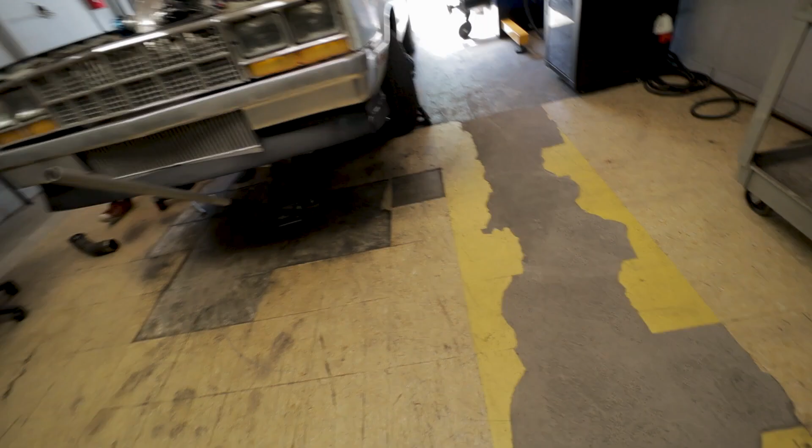I'm not sure that's the most effective use of a jack stand. Just set it next to the car.

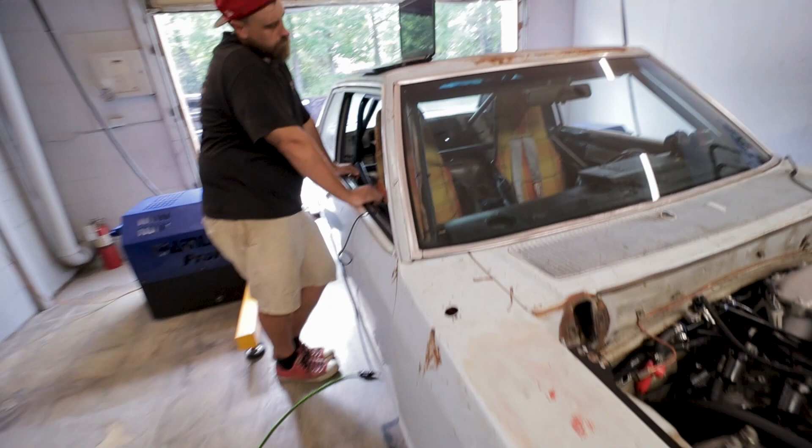Laptop number 3 this week is taking a dump. What the hell? Firmware update again.

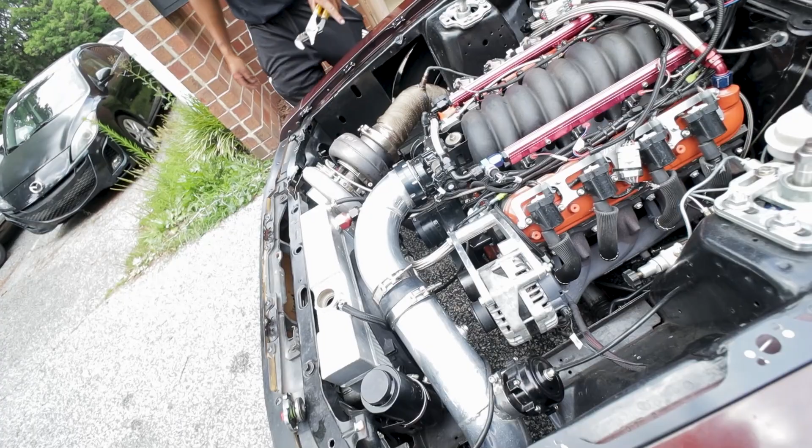Pain in the ass. Now what the hell are you doing? Well, you remember when that belt threw last year? Every single time, all these LS things, everybody shoots belts off. So I got lucky, somebody saw it, it was eating into the... oh shit. Yeah, so I went to Henry's this morning and got a new line.

Yeah, it's always something. I can't win with this thing sometimes.

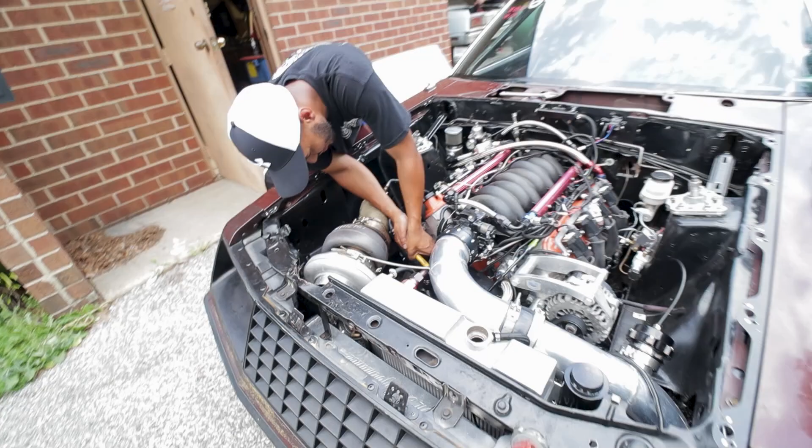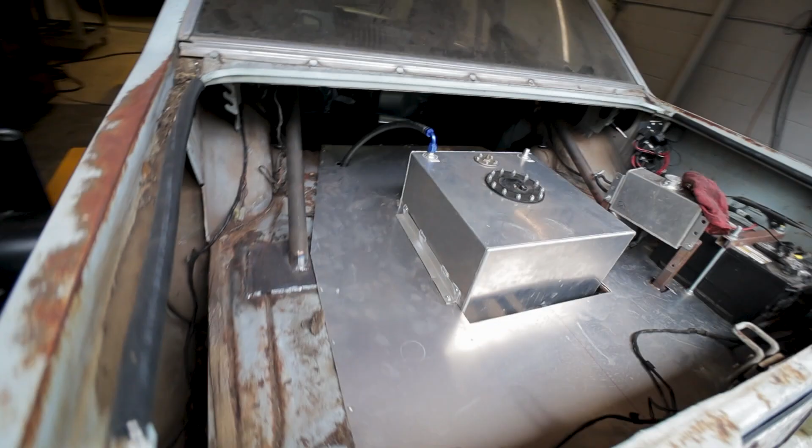Yeah, like, I'm sure you saw the whole thing's like blown up. Actually go back together? Yeah. And you guys like those long dump tubes.

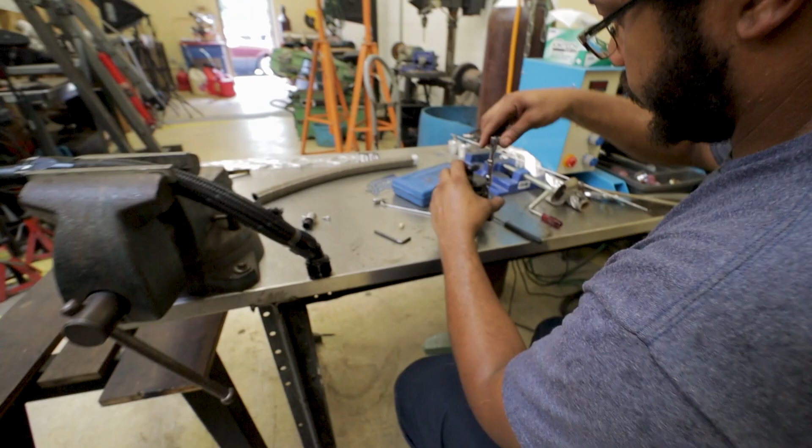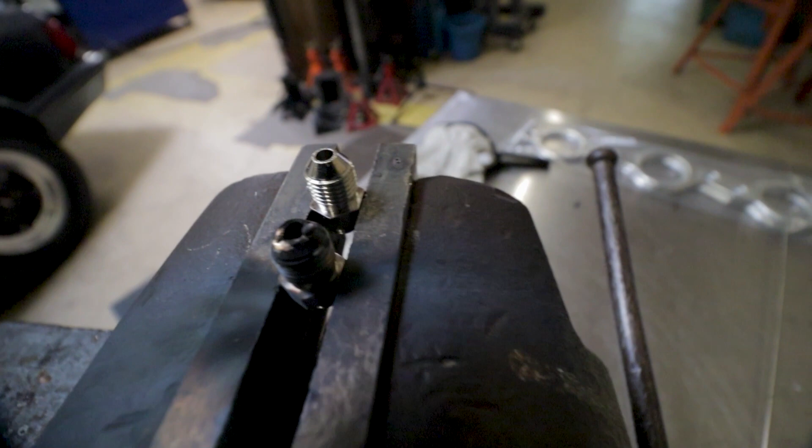Chinese wastegates are leaking CO2 out of the coolant fittings. We don't have any plugs, so we're just going to weld this shut. Kind of ghetto, but it is what it is. So it turns out these are like painted brass, they're not actually stainless, so that didn't go as planned. I'm going to try an actual Tial water fitting and see if that's not just some painted trash. Maybe that'll weld. Chinese fitting, Tial fittings, big difference.

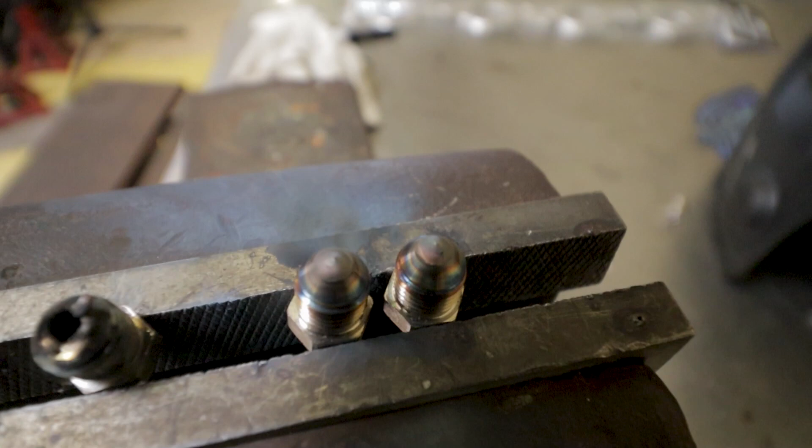Alright, I've been going at this way longer than expected to be as far along as I am. The O2s and stuff are doing some stuff that I don't really like, so I've been taking some baby steps, and might need plugs, got a little bit of a misfire. But just a few pounds of boost, there were about 500 so far.

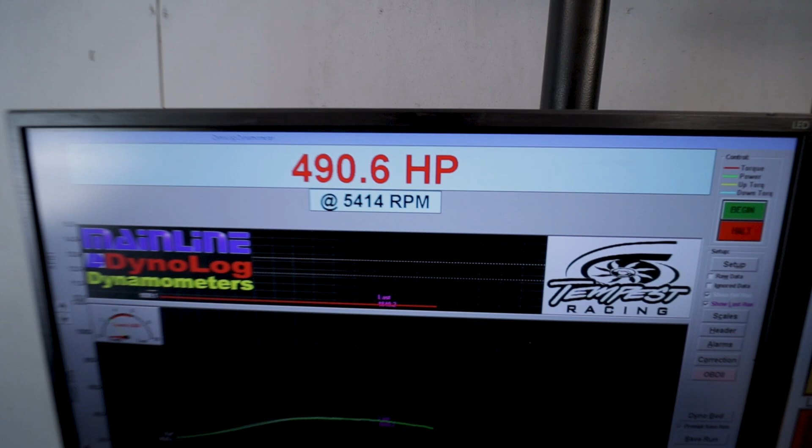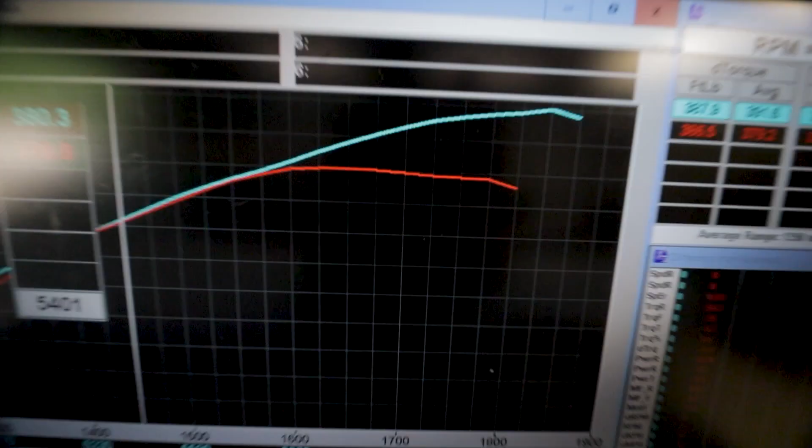There's something you don't see every day. It's got Holley in it too. There's 5 cars here right now with Holley in it.

Alright, finally starting to make some progress. I've been running around like crazy messing with multiple cars all day, so haven't gotten a chance to film much, but we'll start now that everything's actually working.

So I didn't get to film as much of this as I would have liked to on the first day, between computer problems and firmware updates and multiple cars and multiple customers here all at the same time, and then troubleshooting some different issues. Didn't leave much time for the camera, but I guess basically I'll kind of explain what we had going on.

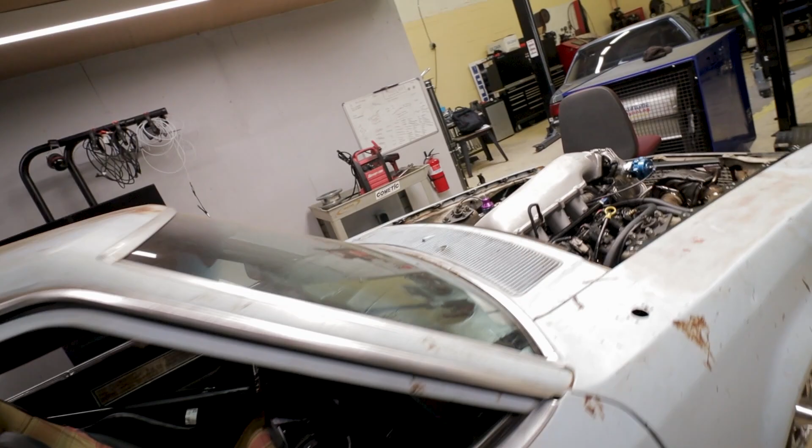The first thing was the computer decided to just shut off and took forever to turn it back on. And then once that finally started working, we needed to do a firmware update and actually upgrade from V4 software to V5 software, which if you've ever done that with Holley can take 30 minutes, 45 minutes, so it takes a while.

Also changed our load from speed density to volumetric efficiency, so basically started all over again on the fueling. And everything was going good, but I kept getting these weird fluctuations in the closed loop control, and it was just kind of unusual. So I kind of ran back and forth on that a little bit, tried revving it out.

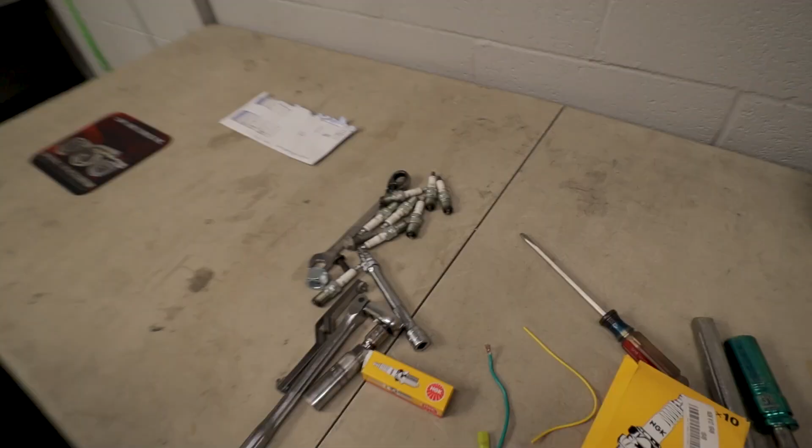And then we started dealing with some misfire problems, so then we had to address that. So once we pulled the plugs out, I guess some plugs were put in just when they were doing fabrication on the car, and they kind of forgot they weren't proper plugs.

So I think we got 3 different heat ranges there, and the plugs are from World War II, so we figured that might do it. It didn't.

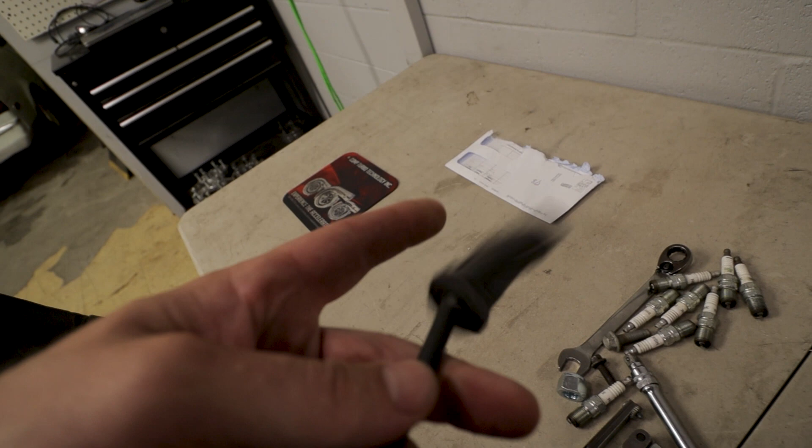And then we found a spark plug wire that's blown up. We have like 6 MSD wires and 2 factory wires. So I thought that would do it. That wouldn't do it either.

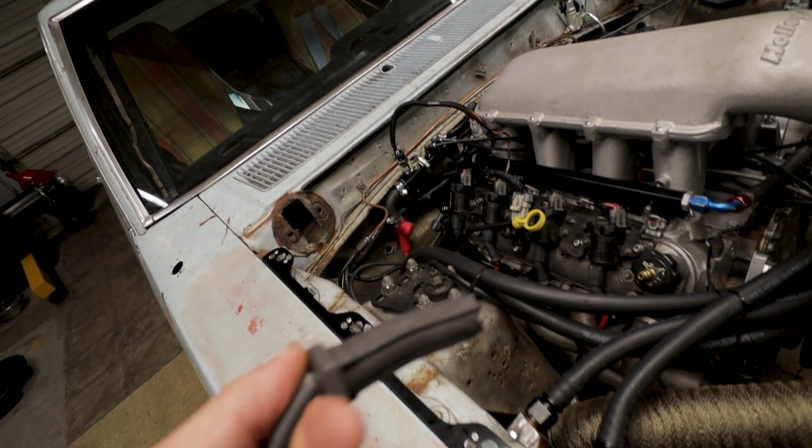And then it just turns out we had a ground wire that was, geez, I wouldn't even consider it loose, just not 100% tight. Fixed that, everything that was weird went away, and at that point it was basically time to go home. So I'll put this back on the dyno in the next few days, and we'll kind of start all over again, and hopefully we got all the stuff sorted out, and it'll be a little bit smoother sailing next time.

Alright, it's been about a week or so since I last had this on the dyno. Just got swamped with a whole bunch of other cars. These big power race cars take a lot of time, so I didn't want to rush through it, and waited till I had a chance to spend a little more time with it.

So gonna try it again. It's raining, insanely humid. Kind of feels like I'm walking around in a bowl of soup, so it sucks in here. I don't really remember where I left off on this car as far as video stuff goes, so basically just gonna start all over again.

What is kind of cool is I spent the morning - damn it, I gotta turn the car on.

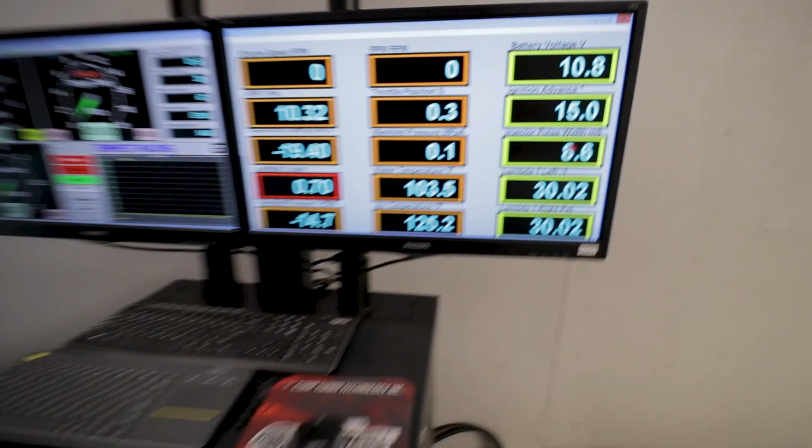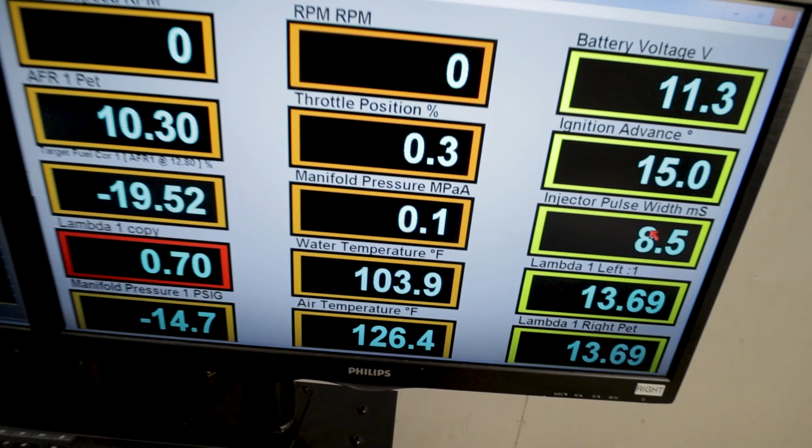So basically I have all of the information that the Holley ECU sees, which you can look through in data logs and stuff. I made some junk and ran it into the CAN bus of the car, and now we can log all the ECU channels through the dyno. I haven't used this yet, so I'll probably be fumbling around with it trying to figure it out while I do this car, but this is going to make a lot of videos a lot more interesting, I think.

So we have the turbos and intercooler up front, and the radiator is actually in the back. Last time it was running really hot without running another fan to it underneath, but yeah, the radiator's back here.

I've been playing with idle, injection timing, and some other stuff. It's still running a little hotter than I'd like to see, and it looks like we got a fuel leak now.

So I'm going to investigate and see where that's coming from. Hopefully it's something simple.

So that's shooting directly onto the header. Thank God we're on the dyno and in a controlled environment, because that could have been really, really bad.

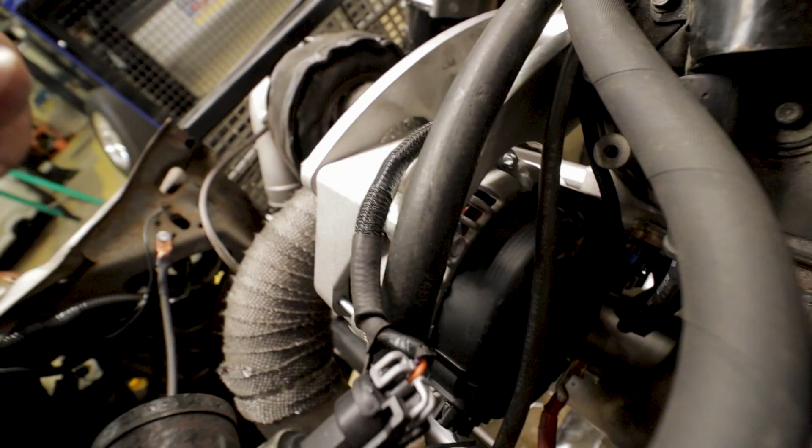I have a used Dash 8 hose here. It's a 90 on one end like that one, straight on this end. That one's a 90, but actually running the straight fitting will help get it away from all the crap that destroyed it in the first place. So I'm going to make up this line, shorten it, and throw that on the car.

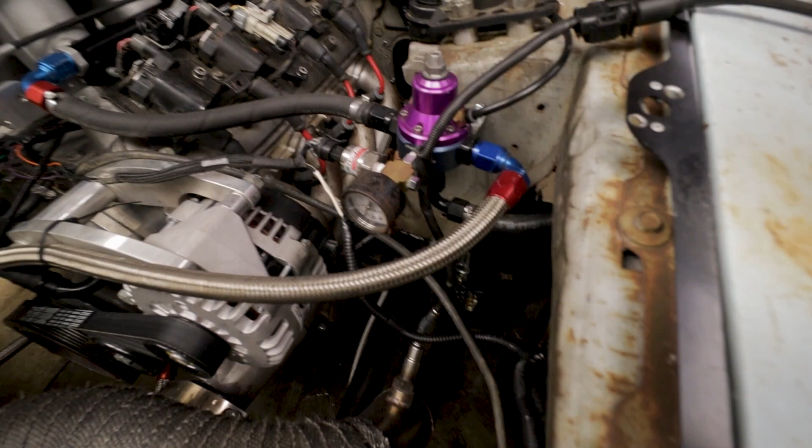Alright, this is just a temporary fix, so don't judge me, but hopefully it won't leak now, and we can kind of start making some more progress.

Throttle cable broke or came apart. I don't know if I have anything here to fix that. Things aren't going very smooth so far.

Basically been trying all day to get a solid baseline run, but haven't been able to do that yet. Just rigged the throttle cable temporarily and see if we can't make like a full pull.

The last runs I made, last time it was on the dyno, it was running like a million, and now it's spitting and sputtering down low and low on power, so something else is going on. I'm gonna try and look it over one more time.

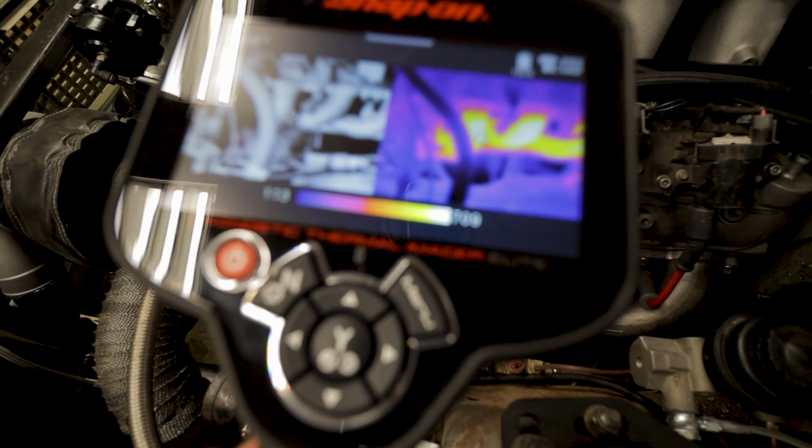Looks like it's working now.

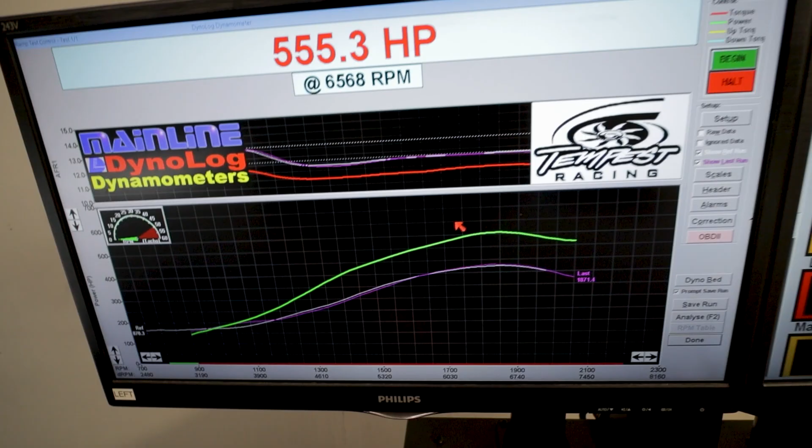Looks like we can finally get started now.

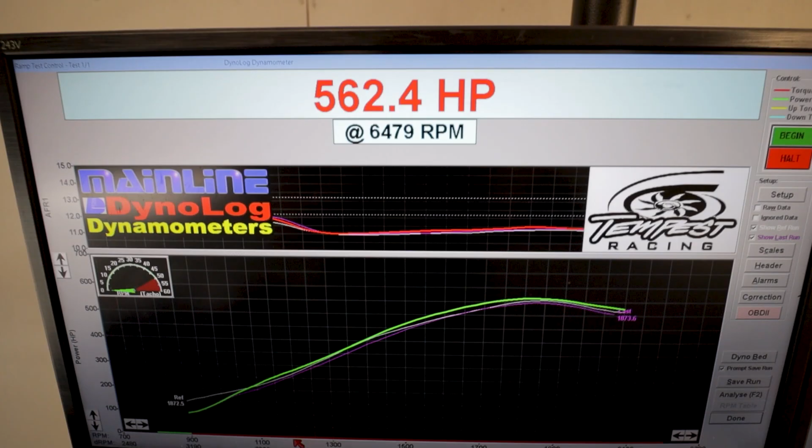Picked up a few horsepower with a little timing, not enough to keep going, so turn the CO2 on now. So far we're at like 10 psi roughly.

Not too bad for just throwing a couple pounds on it. Playing with some ignition compensation stuff. Let's pull the spark plug out of it. I don't care, whatever's easiest to get to.

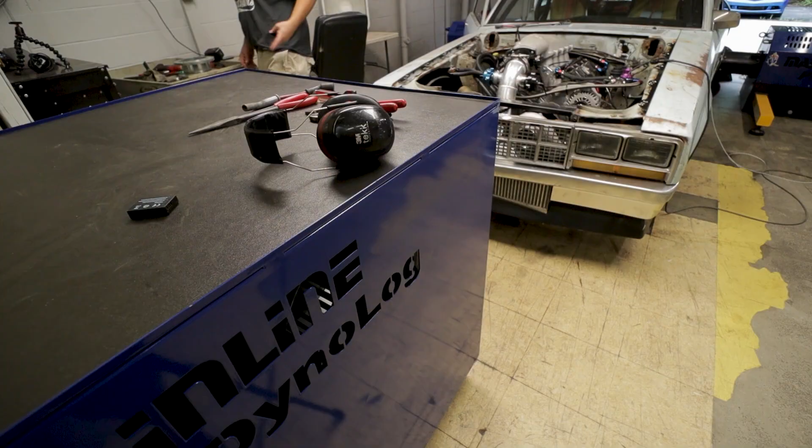Probably can't really see that, but just pretend it looks awesome. Picked up about 50 up top with timing. Right at about 700 now. They probably pick up 40 horsepower if you let it cool off for 10 minutes. It's really hot.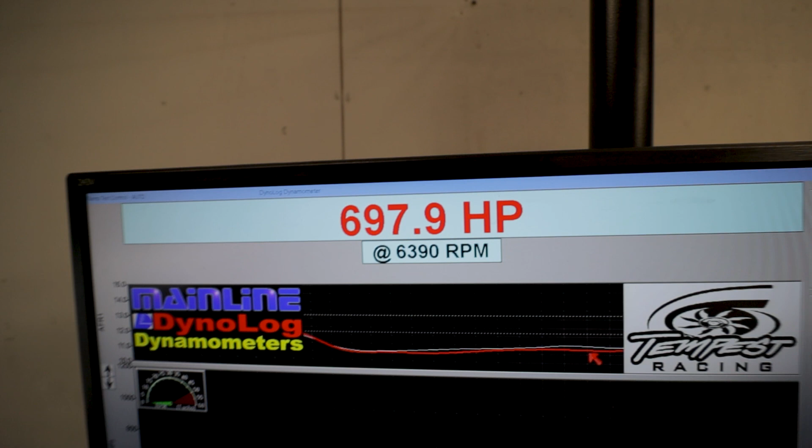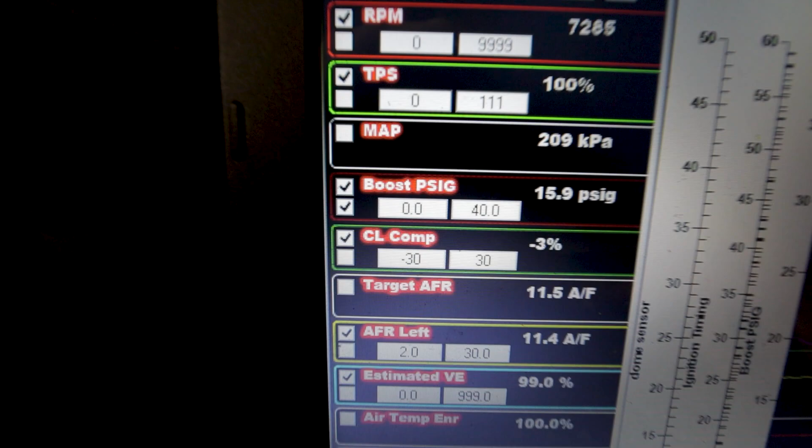Fueling's pretty spot on, basically like 0-1% a majority of the way. It touches 2 every now and then, but perfectly okay with that. 15-16 pounds, about 700.

Alright, it's Friday, it's about 5:30 or so. We're going to call it a day here. Battery's getting weak. It's 4,000 degrees in here. I'm sweating my balls off. Can't even touch the intake manifold. So I just want to let everything cool down rather than trying to rush through it and throw 100 pounds on the top of the gate.

But I'll show you a few things that we have going on. Now that I can log ECU data through the dyno, it's really redundant because you have all of the same information in the data logs, obviously, but being able to lay it over top of the dyno graph and sort of see it all in one spot, and I can lay screens out differently. And then there's some other stuff too, but I'll just kind of walk you through a few things that I've played with so far.

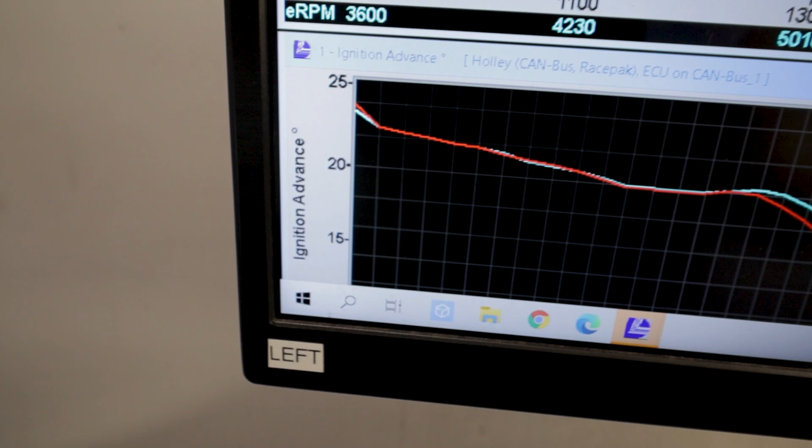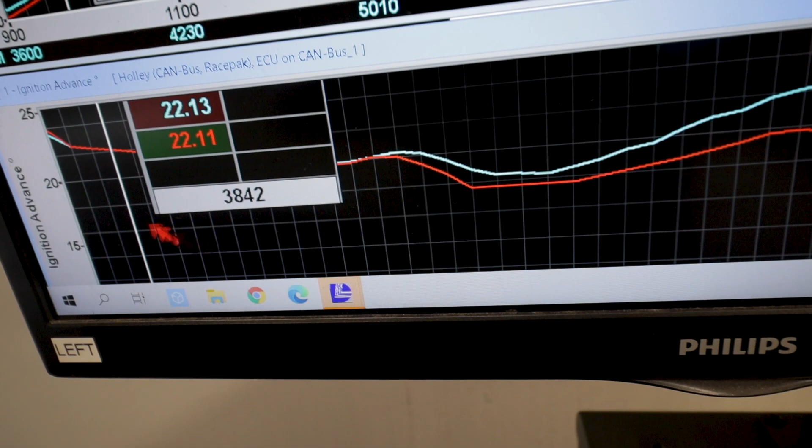Most of this stuff's pretty self-explanatory, but you know, it's always good to see it on a dyno graph, so this will make for some pretty cool testing videos down the road. Between these two runs, you can see timing drops as manifold pressure comes up, peak torque kind of, or as it's ramping up to peak torque, pulled a little bit out. And this one's laying over a little earlier than I'd like to see, so just kind of keep giving it timing upstairs, and it ends up being pretty flat. Every time I give it timing, it likes it, but I don't really want to go too much higher.

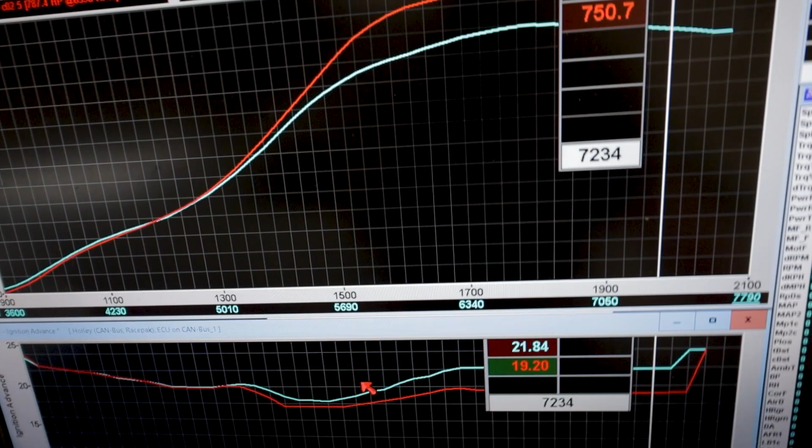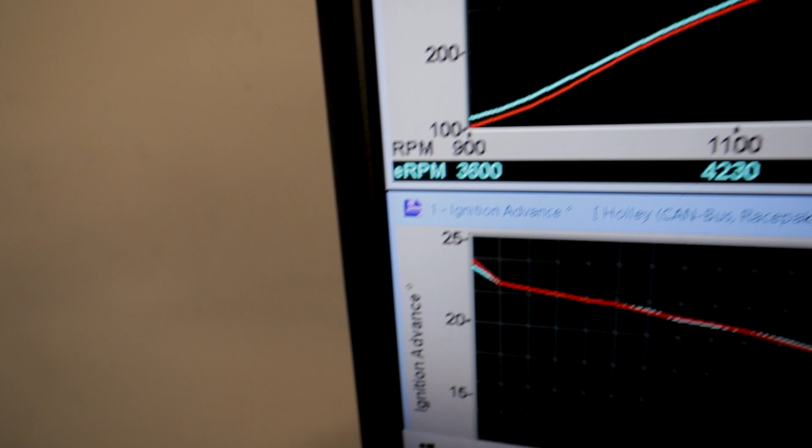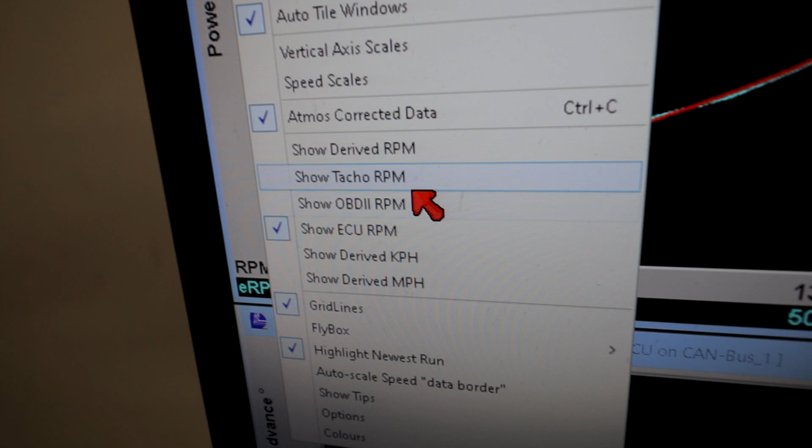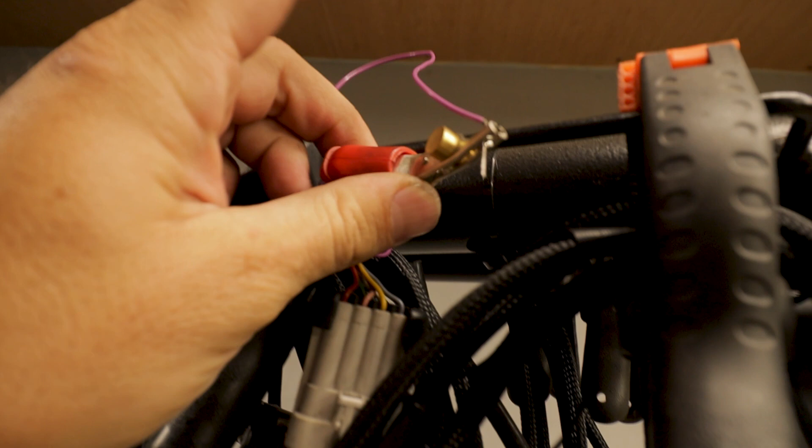And then I have the OBD2 stuff as well. Unfortunately, I can't run OBD2 in line with HP Tuners, so I don't get to use it too often. And then tach RPM is using, I get a clamp, and then these here. This one works awesome, but it's a little tedious to hook up on certain cars. These ones a little hit or miss. On street cars, it usually works every bit as good as it needs to, but you throw it on a 2,500 horsepower car and it kind of starts dropping out.

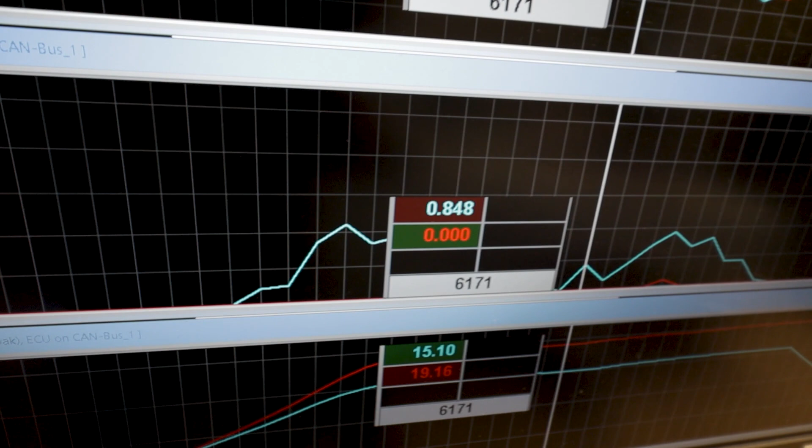And then able to see air fuel from the actual ECU, so that's convenient. Everything looks a little choppy because of the scaling and sample rates and stuff, so that's all adjustable, I just haven't had time to play with it. And again, we already looked at, we have closed loop, which we can see what the corrections are, which is pretty good. And then we have manifold pressure from the ECU, about 19 pounds on that one.

So I have a handful of different pressure sensors and stuff. You can still use these in line if you want to measure pressure from something that the ECU doesn't have, or you want to verify that the ECU map sensor is reading correctly. I've had it before where cars will make 200 horsepower more than they should at a given boost level, and then you find out just the O-ring for a sensor is bad or something. So it's always nice to have other options.

There's all kinds of other stuff that we can do and look at as well, but this is really all I've had time to play with so far. So let this cool down a few minutes.

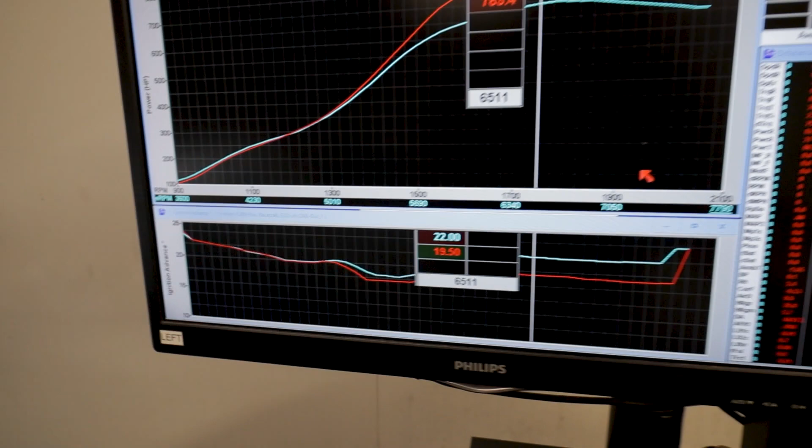This will make 800, no problem. And I think we're just trying to get to like 1,000. So I don't know if I'll make it here over the weekend, but if not, I'll try and wrap this thing up on Monday.

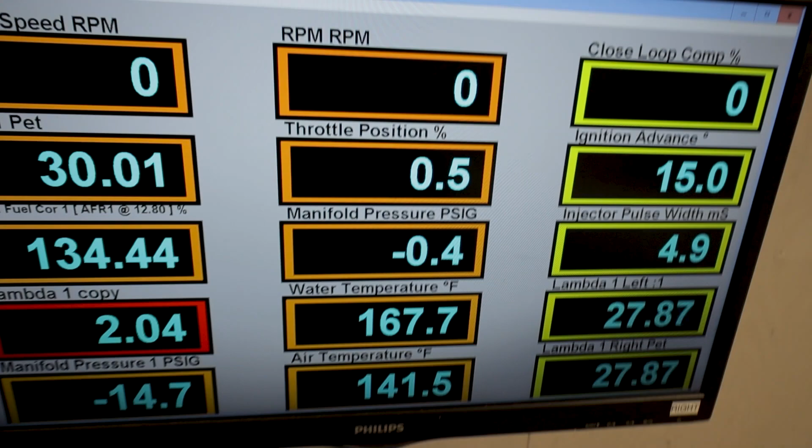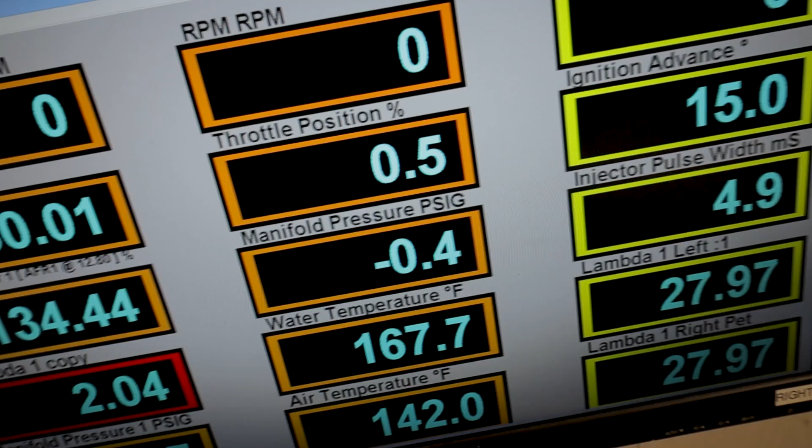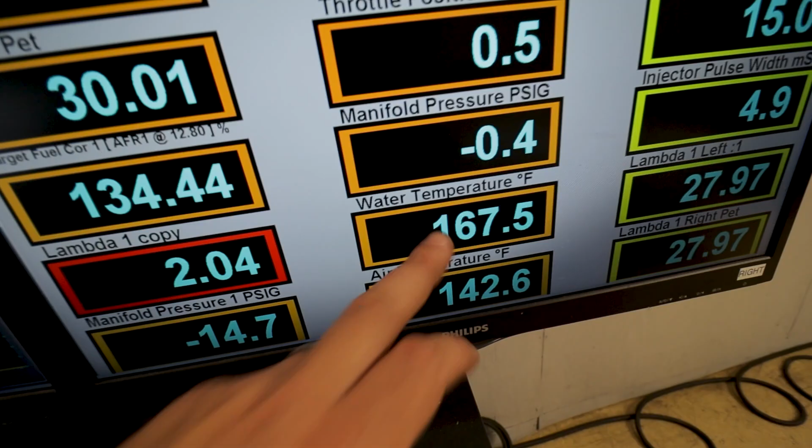Here's just some of the ECU channels I had pulled up that I can look at on this screen while I'm making a run. These are basically all the ones I would use when I'm not using all this other stuff, and I can configure this however I want with basically however many channels I want. Just the more you have, the smaller they get. But ECU RPM, throttle position, manifold pressure, temperatures, lambdas, pulse width, timing, closed loop. Just having the water temperature up on here is really nice. And then I can keep an eye on all the sensor data on this screen as I'm making a run.

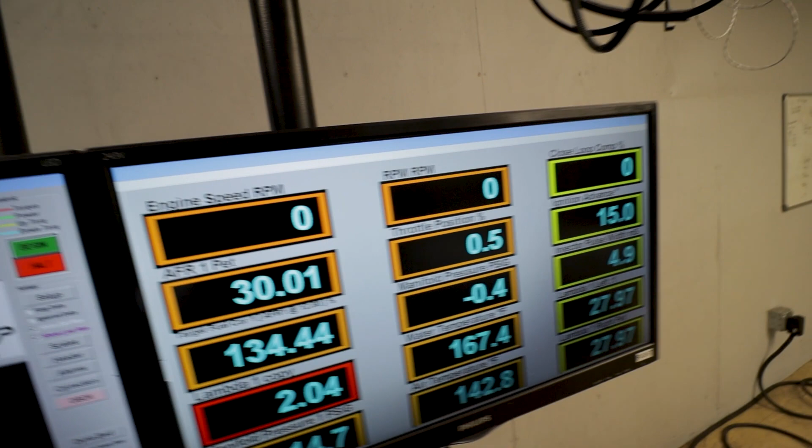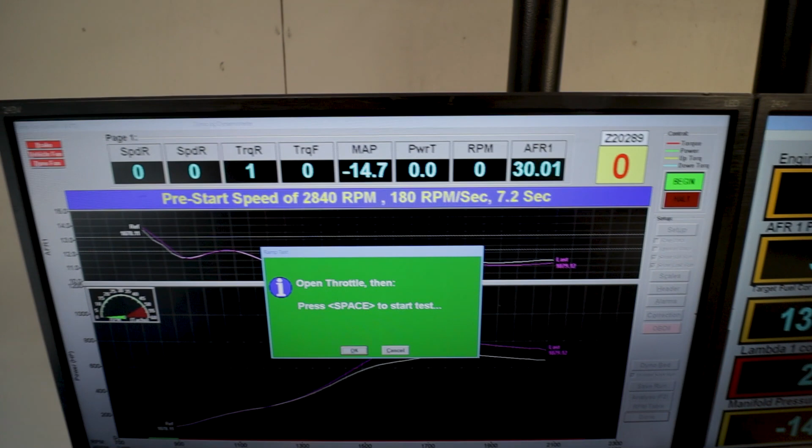I haven't set this up for anything else. I'll probably leave this because I do so many other cars as well. But these are way faster than these — these get all the processing power. There's just an endless amount of data between this and the ECU, and it's a lot of fun to tinker with.

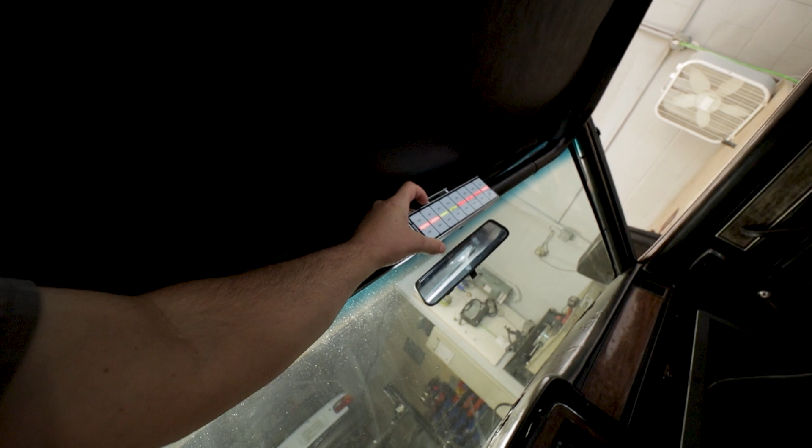Good chance to see how well it cold starts after all those changes. Not too bad.

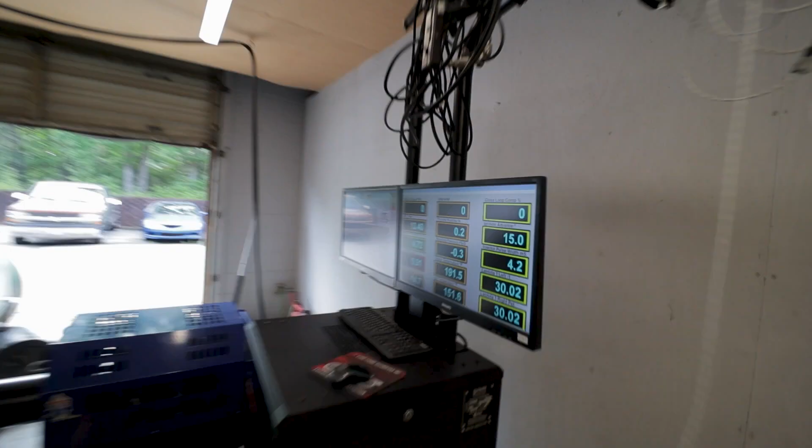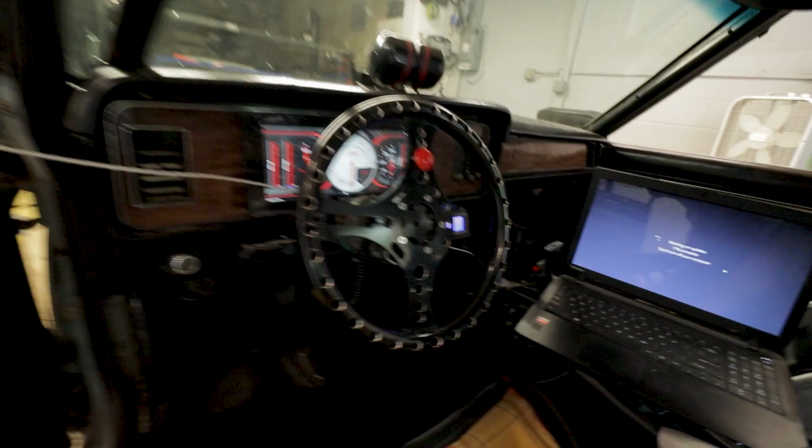Definitely nice and safe on that.

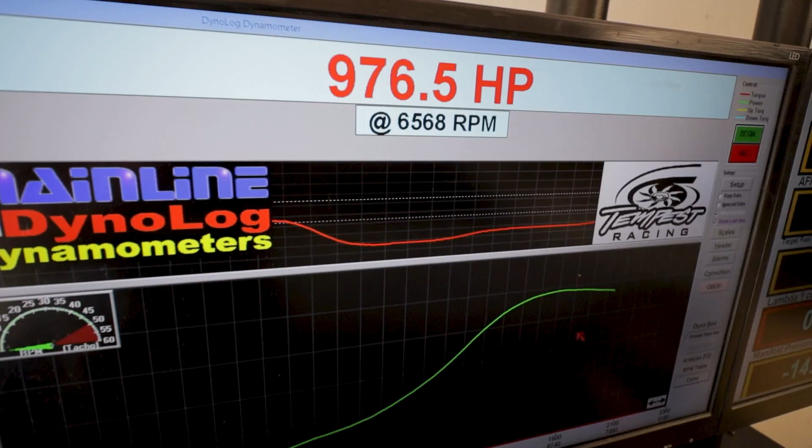Getting there. A little fat on spool up. Everything else looks fine.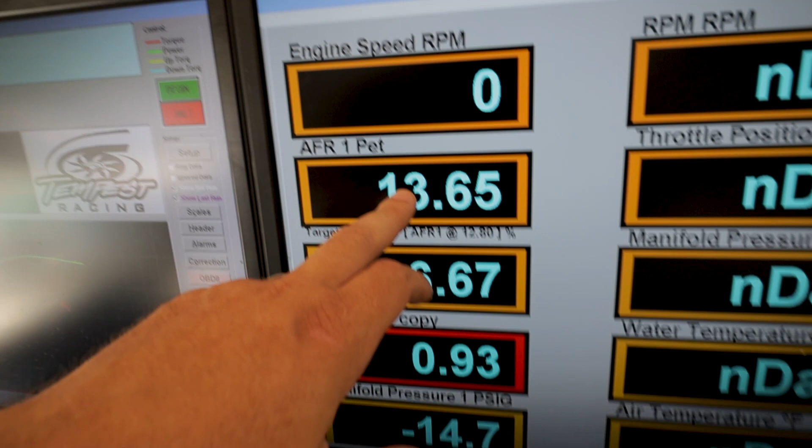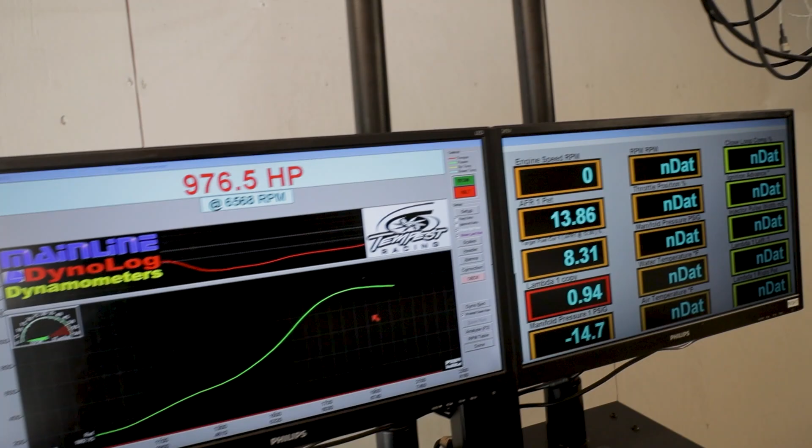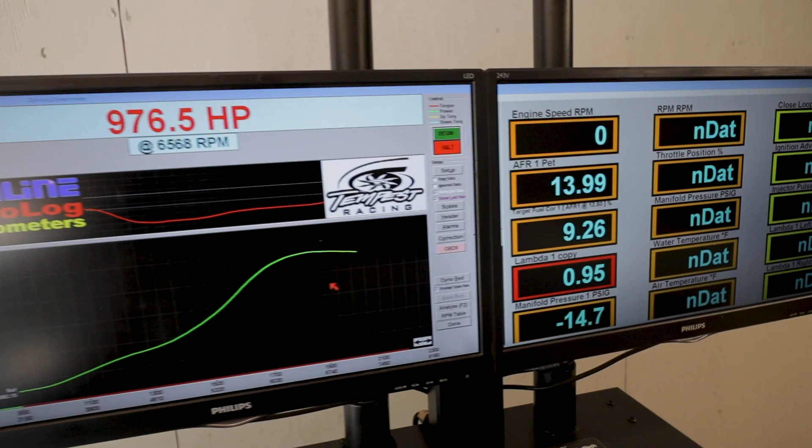I'm actually— this is actually one of the banks. That's the dyno air fuel, and then over here is the other bank reading through the ECU. It's a little— you never know if it's just the sensors reading a little bit differently or if the bank to bank's reading a little bit differently, but out of precaution I'm just going off of the leaner of the two, which in this case is the ECU data, and that's where any of our closed loop compensation is going to come from as well. So I'm riding that primarily and just using this for a reference.

It's a little bit interesting, it doesn't seem to be laying over quite as hard as we turn it up. Usually it's the exact opposite there.

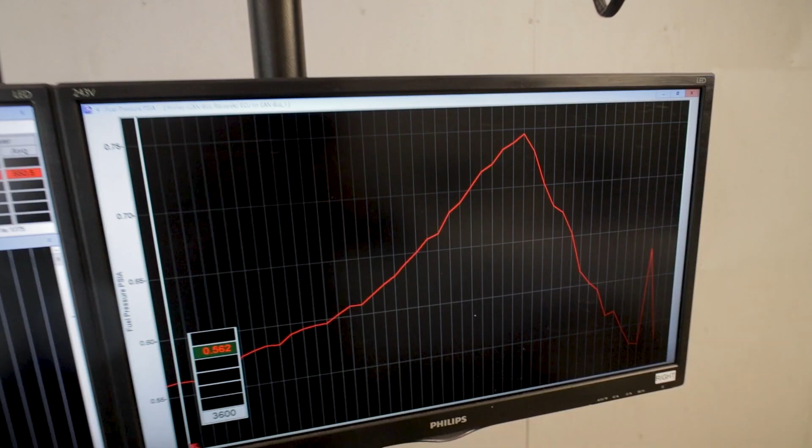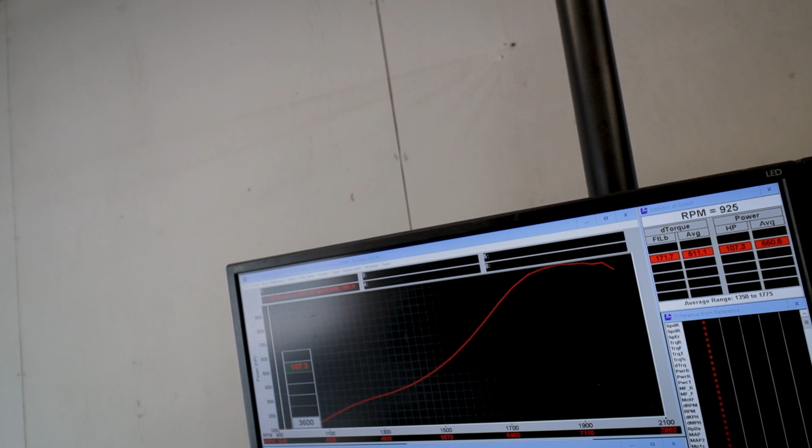Here's fuel pressure. Obviously it's just totally tanking, so that's probably going to be the end for this one. I'll look around at a couple things, maybe I'll make one more, but it's not looking promising as far as the fuel delivery goes.

Doesn't necessarily look like it's leaking, but it's melted to all hell. I'm going to slap another fitting on it and try and make one more run.

Alright, swapped out some fittings and vacuum hoses and stuff. Poured the last of the fuel that was brought into the tank. I'm going to try and make one more run. I don't have high hopes, but we'll see what happens.

The fuel pressure dropped a lot, so I can't help but think a fuel pump's cutting out or a fuel filter's totally clogged or something nasty like that. But cross my fingers, let's see what happens.

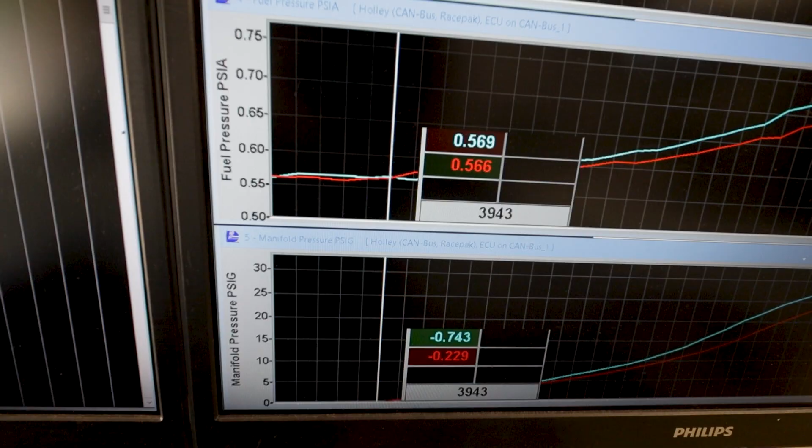Alright, I'm calling it quits here. Time to go watch some hockey.

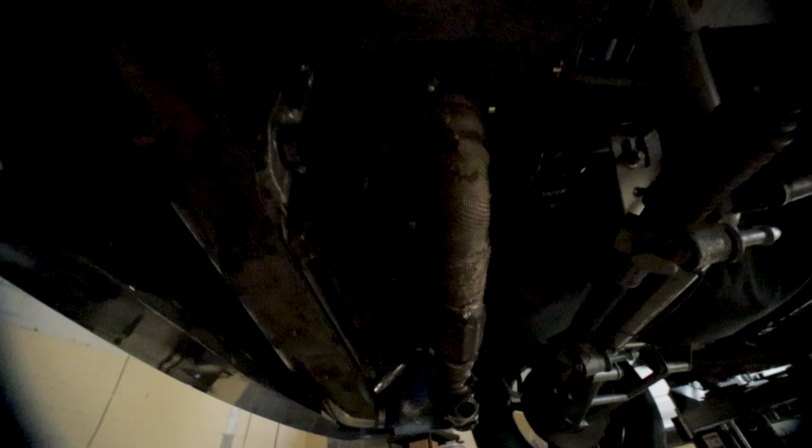And tomorrow I'll get started on this Mustang with Terminator X in it. It actually has a Ford motor in it, which is kind of weird. And it's got a turbo kit as well. I made another video just getting this thing started up and running. It's been way too long since I've been trying to get it on the dyno, so we'll do that, and that'll probably be the next video.